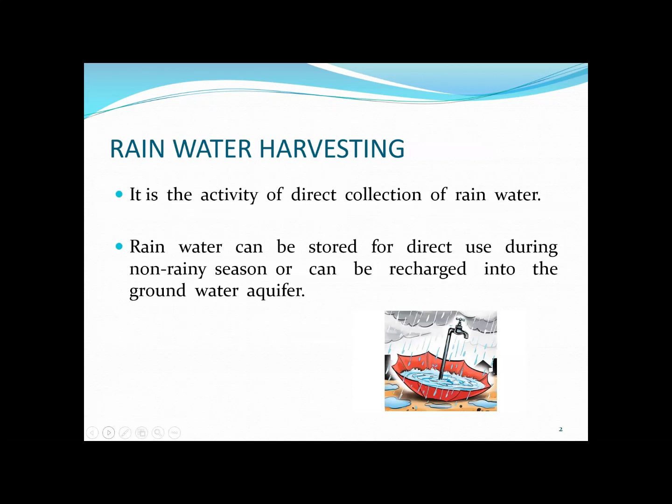Now, when we talk about rainwater harvesting, it can be defined as a way or process of collecting rainwater which is going waste. It has many benefits, as you can see. The first and second points tell about the water table depletion. Simply, it means that we can increase the level of groundwater table by sending rainwater that we have collected through recharge pits to the aquifer.

The third and fourth points normally depend on groundwater level too. As we know, seawater is denser than fresh water. Owing to this fact, it becomes easy for seawater to enter into the coastal aquifer due to the depletion of groundwater table. So by rainwater harvesting, we can solve it, as collected water can be sent to ground to increase groundwater level.

Coming to fifth and sixth points, these depend on collection of fresh water. Normally, water flows from higher elevation to lower point and gets collected there. By rainwater harvesting, we can avoid it.

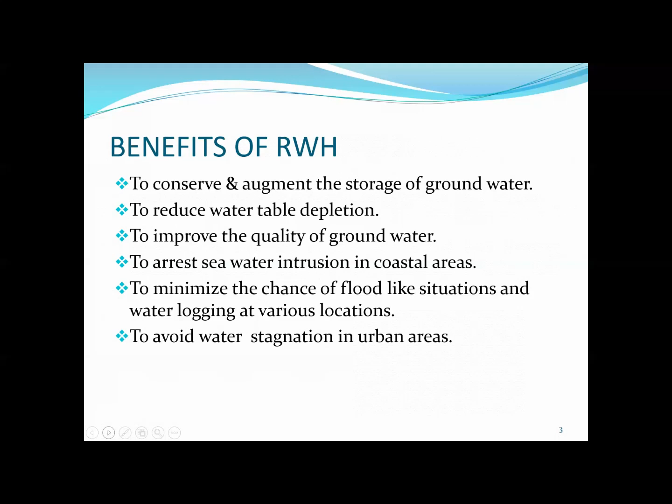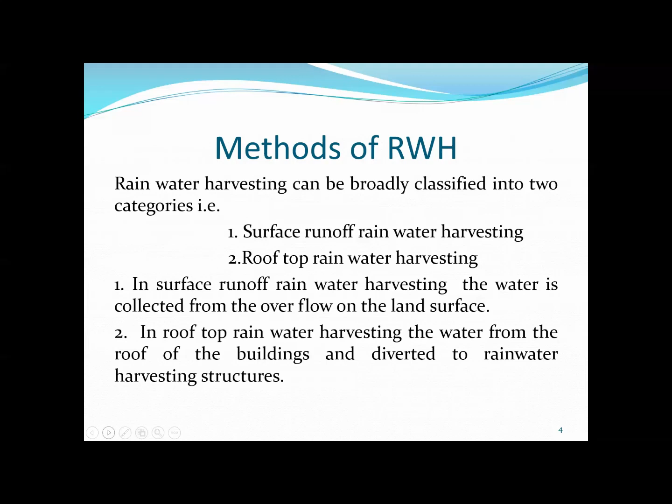Based on the collection of water, we can classify it into two methods: rooftop rainwater harvesting and surface runoff rainwater harvesting. In the first picture, you can see the rainwater from rooftop carried through pipes and collected, and later it is transferred through a sand filter and carried to ground. In the second picture, the rainwater which is falling on land from different sides finally meets at one point and it is stored. We have adopted rooftop rainwater harvesting in this.

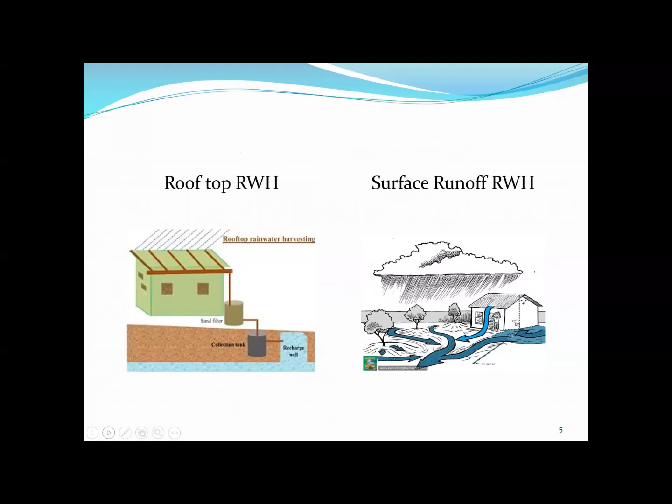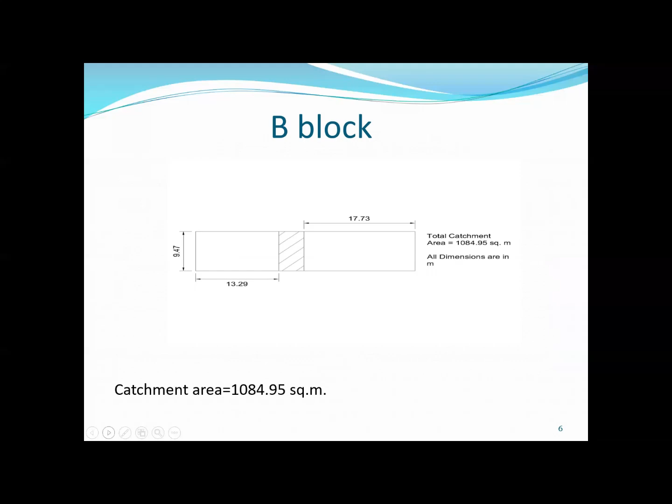We have calculated the area by using total station, and after knowing catchment area, we can find the volume of tanks. You can see the picture of B block top view, and its catchment area is 1084 square meters. Here we have provided an underground tank for rainwater storage purpose for future use.

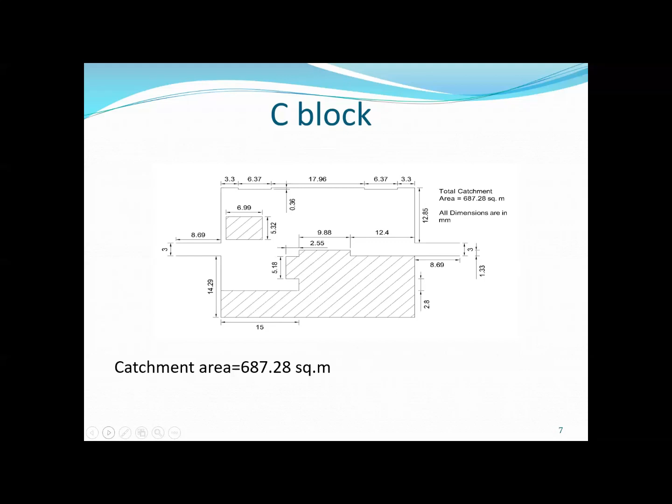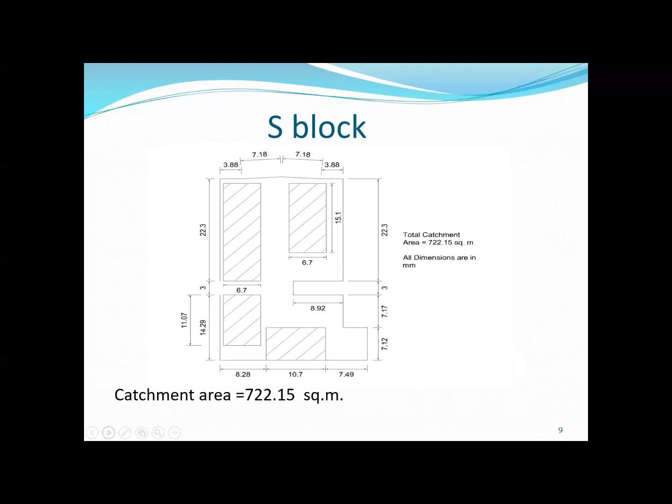The water which is collected in tanks can be used for flushing purpose in washrooms. That is the reason we have rested the tanks beside washrooms. Without consuming electricity, we draw water through gravity flow. The excess water can be carried through pipes from C and S blocks to the underground storage tank.

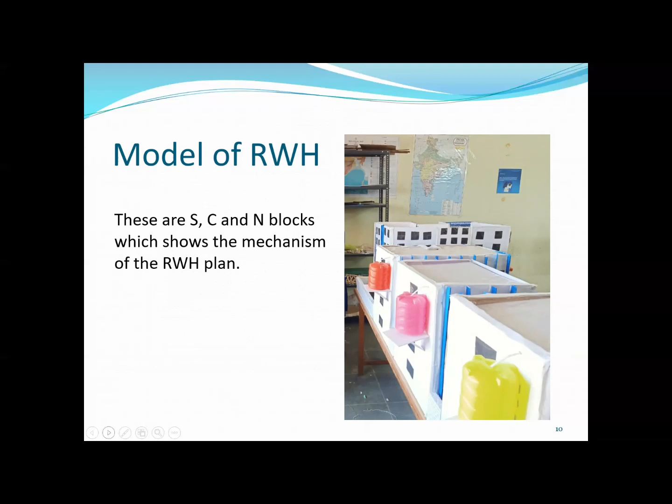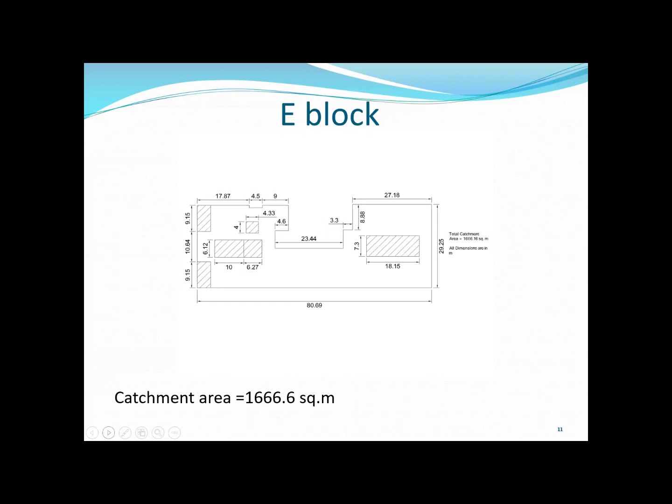And coming to the top view of E block with a catchment area of 1666 square meters. In this, we have adopted the same as earlier blocks. We have prepared a recharge pit. We can see many uses of recharge pits nowadays. Every individual house is set to construct recharge pits by the government for improvement of groundwater table. If overflow takes place, the water from the tank can also drop into the recharge pit.

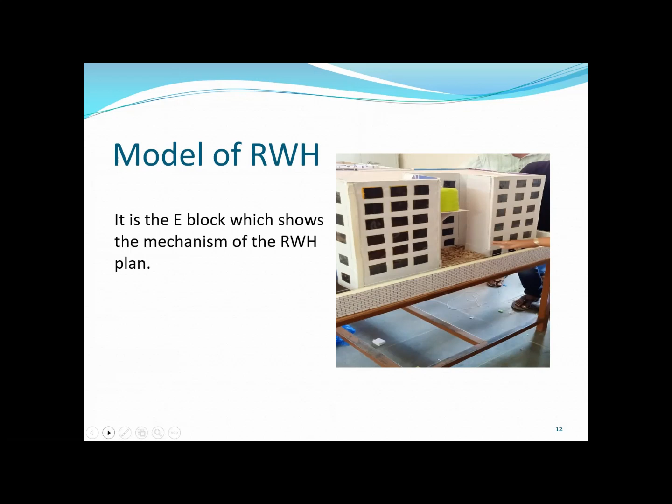Save water and it will save us. Let's save rainwater.